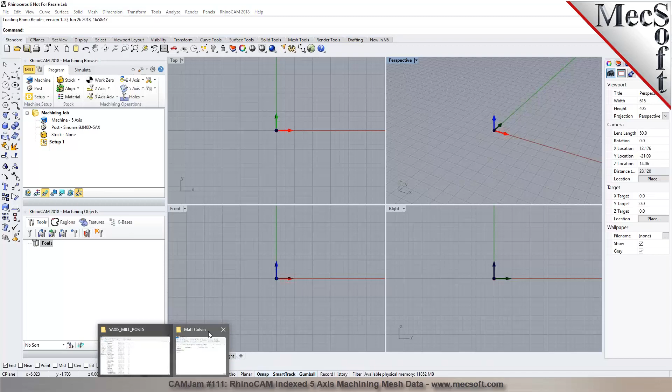So the typical workflow in here is we import or load the file. There's a couple of ways how we can do it. So I can just select this file that you had emailed us in here, and I can just drag it and drop it in here, and it'll ask you, do you want to open or import it? I can pick open.

And now when you open it, it'll ask you what units was this file designed in. Was it in millimeters or inches or whatever the CAD model units is? You can select those relevant units for it. Would you know if it was in millimeters or inches? Try millimeters. Millimeters, okay. I'm going to accept that. And it's translating the file, reading it.

And once the part is loaded, you will see that up here on the viewport. So if your part has a lot of triangles or meshes on it, the load time could take anywhere from a few seconds to a couple of minutes. So as you can see here, it's in the process of loading it. And you can see now it shows up in all the 4 viewports. I can just maximize it to 1.

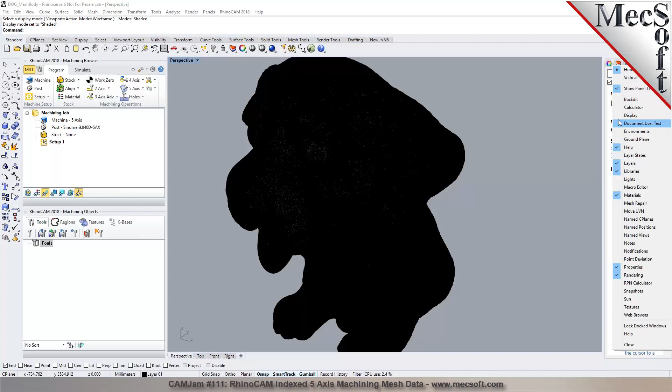I can click on display in a shaded view, and I can also go into this display tab in here, where we can turn off the display of the mesh wires. So I can go into the display tab and turn off the wires so we can actually look at the model.

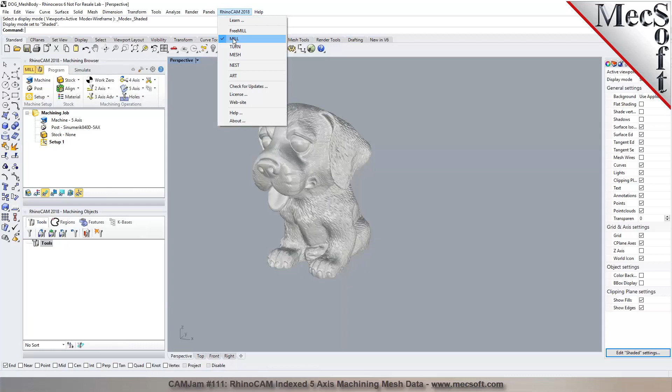Okay? Yep. All right. Now, the part is somewhere out in space, so we'll look at how we want to align it, orient it. So the typical workflow is once you bring in a part, you can go into the machine setup on the Program tab in the RhinoCAM's machining browser. So the RhinoCAM's interface appears directly in Rhino. As you go up to the RhinoCAM menu, you'll see that the mill is automatically selected. So it's a fully integrated CAM plugin for Rhino.

So the typical workflow is you go down to the Program tab, you select Machine, and you define the machining process here. So you would select the machine number of axes is 5. You pick the configuration as head because the machine that you have, the Thermwood, uses the rotation on both the heads. You can specify the primary axis, the secondary axis, and this is where we talk about the gauge length. So this gauge length is the distance from the pivot point to the spindle face.

And then you also specify the tool length as you define your tool, since the tool lengths could vary for each tool, but the gauge length is going to be the same for a given head. Am I making sense here? Yep. Okay, so you would put in this. Do you know what that would be? I have that gauge length. It's in inches. It's 10.4983. 10.4983. So take away one of those 4s.

Okay, got it. Right now this is excluding the tool distance from the tip of the tool to the spindle face. Is that correct? So we will add the tool length to it. Okay, perfect. So when you set this to a non-zero value, we do that automatically.

Now, as far as the post processor goes, we've developed posts for a wide range of machine tools, and we also have several different variations for Thermwood machines as well. So you can see that I have a bunch of different posts in here. So if I grab one of these posts, I'm going to go ahead and grab this. If I do an edit, this will let us modify or customize the post processors in here. And you can see here we use either the G47 or G52.

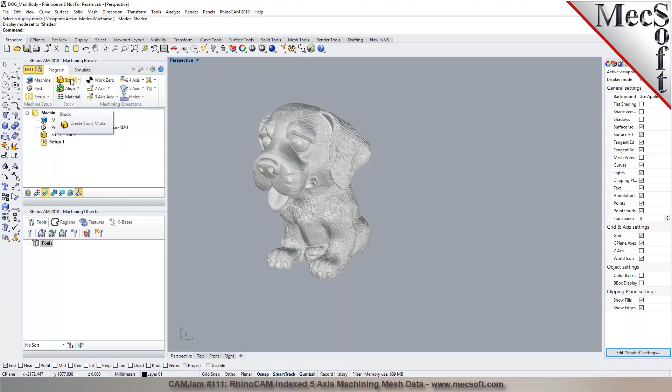So as you take a look at it, the part looking down from the top view, does the part look in the right orientation? Or as you look at it from the front, does it look as how you want it to be machined? So make sure that the part is oriented and placed correctly on the machine tool. So that would be the next step, the orientation. You can orient the part if you need to. And then you build your stock material.

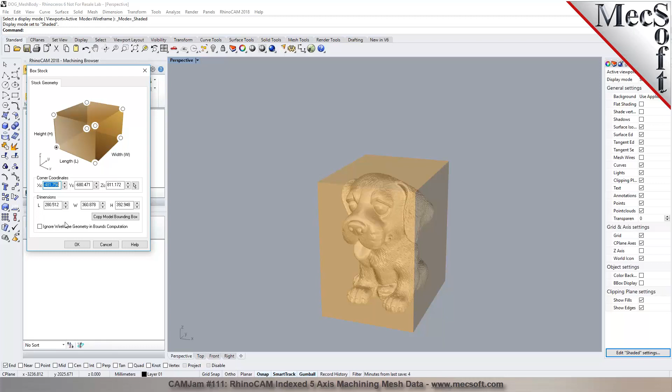So when you go to stock and box stock, this actually computes a bounding extents and gives you the length, width, and the height. Is that in millimeters or inches? Right now it's in millimeters. Okay. Do these numbers look correct? Right. Yep. Okay. Would you like to work in millimeters or would you like to work in inches? Inches is preferred. Okay, so the process to switch is pretty straightforward.

So just right-click on the millimeter units down in the status bar, go to unit settings, and then you can change from millimeters to inches, and then you accept that. It'll ask you, would you like to scale the part, and you select yes. So in this particular step, the model unit was switched, and then you can go back and check the extents here. Now you can see that the length, the distance on the x-axis, is about 11 inches, the width on the y is 14, and then the height or the thickness is about 15 inches.

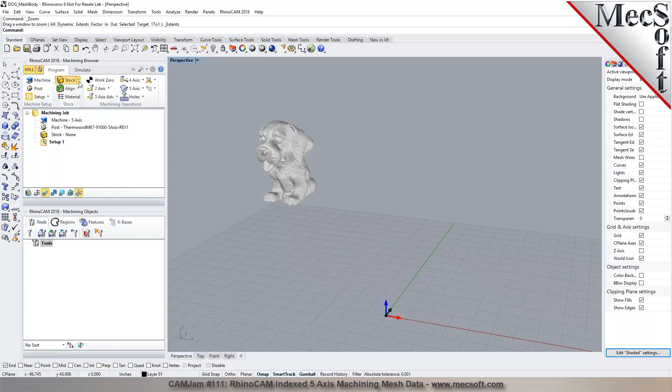That's correct. All right. So we could go ahead and define the stock in here, or we can orient the part and then create the stock. So we can do align part. We could say we want to put the part to the lowest Z and in the center. If you want to put it in the lowest Z and center, you can place it right there. So now the part is right on the origin as you see it.

Now, would you like to zero it out to the top or to the bottom? We can zero out. That's fine where it's at. That works. Okay. And let's go ahead and create a stock in here. And I'm going to hit copy model box. It gives me the length, width, and height. I'm going to make the stock slightly larger.

So instead of 11 inches, I'm going to put in 12. I can change this to 15. And then the height is 15.47. I can round it off to 16. Okay? Yep. And the next step, we want to align the stock to the part. So what we would want to do next is basically go through the process of align stock. We want to put it to the bottom, and then the center in X and Y.

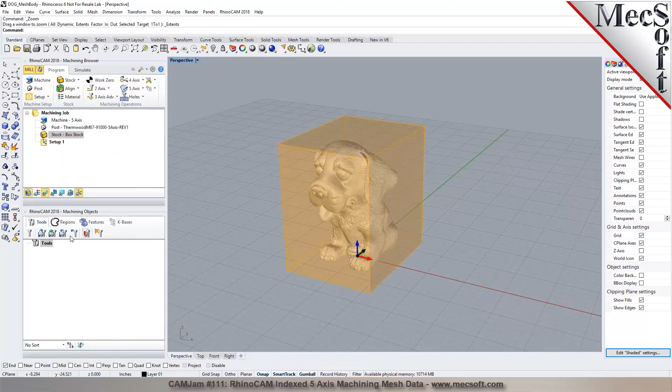So as you take a look at the stock and the part from the front view, you'll notice that the bottom face of the stock is flush with the bottom of the part. And if you look at it from the top view, you will notice that there's material left on all the sides. So now when you save this file in Rhinoceros, it will ask you where you want to save it. You pick save. All of the information that you put in so far gets saved with the file.

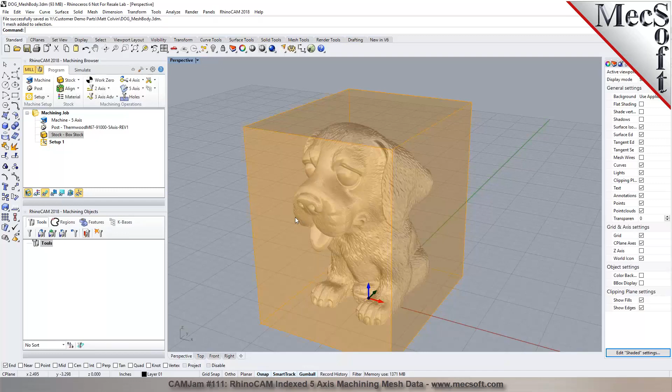So one of the things you could look at is the number of meshes or triangles you have on this model. For some of the machining applications, you may not necessarily have to have a model that has so many millions of triangles. So one of the things you could do is go into Rhino and type in the word what, and it'll tell you how many meshes are there. So you can see it's a little under 3 million. Is that right? Yep. Okay.

So there's a couple of ways. To make it easier for machining, you can reduce the mesh in Rhino, or we also have an add-on module called Mesh, which gives you additional controls for mesh processing. So we have this mesh module where I can go in to do a mesh reduction. I can select this mesh, and I can say I want to reduce it down by, let's say, 70%.

And then I can pick reduce. This will actually reduce the number of triangles to a third of its actual size. So the mesh module will allow you to do mesh processing, mesh editing. You can also do mesh offsetting. So there's a lot of mesh tools available to you.

So if you don't need such a high, fine refined mesh, you really don't have to have it. It'll also improve the processing of your toolpath, making it a lot faster. It's just a balance between reducing the mesh and lowering the surface finish. If you look at the details after reducing the mesh and it looks good, then what you see is what you get when you actually program or machine it.

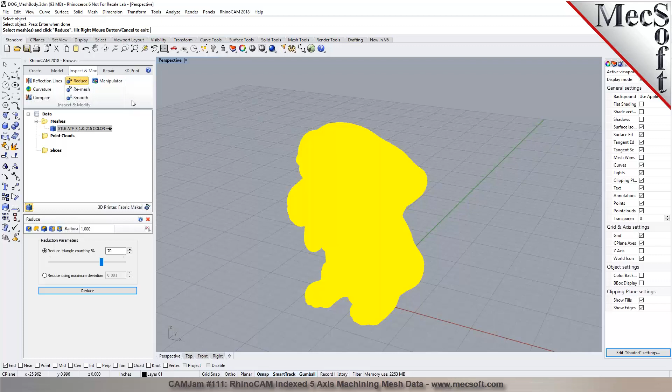So now we can see that the mesh reduction is completed, and we can take a look at the count of how many triangles we have. You can see now it's down to less than 1 million triangles—859,000 triangles. So now you can see the details are still there, right? It's not like we've lost it. The resolution is still there.

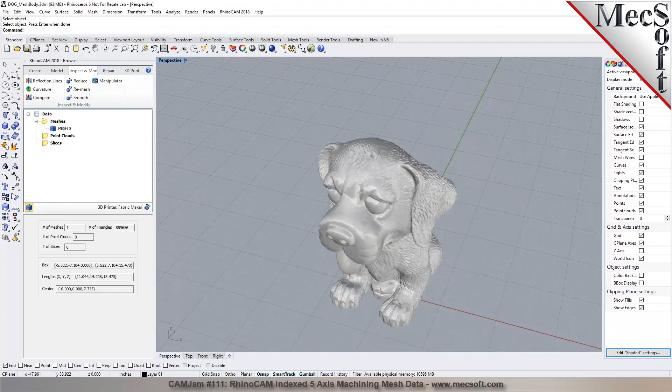It's pretty good. Okay, so let's go back into our mill module, and then we can start processing our toolpaths.

Now, typically, in a part like this, you would want to do indexed machining, like machining from different orientations. Is that right? Yeah. The first step is mostly 3+2, 5-axis indexing.

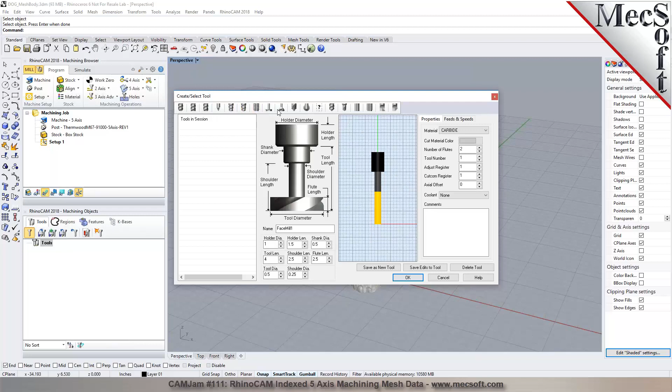So the prior way we do it is go ahead and create some tools, or we can load a library of tools. We support different tool types like ball mills, flat mills, corner radius tools for engraving, chamfer, taper, thread mill, flat mills. We can also use dovetail cutters, fillet mills, lollipop cutters—these can be used for 2D operations. And you have drill, center drill, reamer, tap bore, and reverse bore.

You can define tools under each tool type, also set the feeds and speeds, and save them all to a library. Now I could use these tools here or load one from a library. I can go find a tool library that may have been saved somewhere. So I'm going to go into one of my folders, and I'm going to go ahead and grab a tool library.

Just give me a moment, let me go look for a tool library file in here. Well, I can give you the 3/4-inch ball mill that we're going to use for most of it. Okay, is that what you're going to be using for most of the part? Okay, so I can just go ahead and drop a 3/4-inch ball mill in here. So I'm going to define a tool specified as ball mill 3/4-inch.

Now, would you be using the same tool for both roughing and finishing, or different tools? There'll be a 1/2-inch ball for finishing. So this will be the 3/4 for roughing, and then a 1/2-inch for finishing. And what would be a typical tool length, like 8 inches or 7 inches, or long? It's only...

4.074. Okay, you got it all precise. Okay, perfect. So I'm just going to put in tool length as 4.074, leave the tool number as 1. In the feeds and speeds, I can go ahead and establish feeds and speeds based on the material. I can also say what is the maximum RPM your machine can handle and the cut feed rate, and set these up here.

So, for example, I can put in this is 3/4 of an inch. It gives you a recommendation of the spindle speed and cut feed rate based on the material and the tool material, and I can change the spindle RPM. I could say I want to run it at 15,000 RPM. It'll recompute your feed rate for like 300 inches per minute. I can go ahead and accept that.

I'm sorry, can you repeat that again? It's a 4-flute end mill, so you actually get—you can go with a much higher feed rate. Yes, I can see that. Okay, so I can go back and change the number of flutes to 4, and go back to feeds and speeds, select this here, and now you'll notice that since the number of flutes is higher, you can cut even at a higher feed rate, right?

Yeah, good. So what would your feed rates typically be? On these Thermwoods, they actually just run them at 1,200 because the acceleration and deceleration is so slow that it doesn't matter.

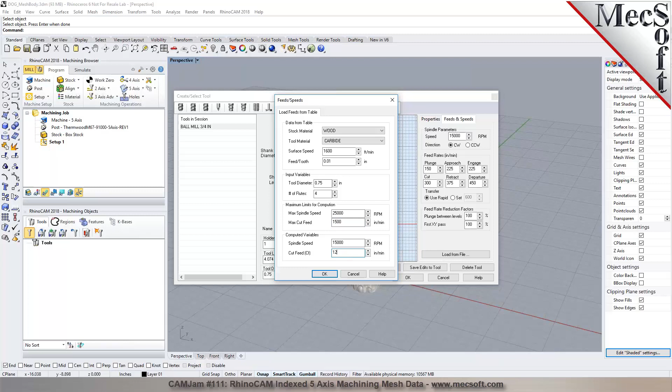So you can run it at 1,200. I'm going to put in 1,200 here, accept that, and save the edits to the tool. So this would be a roughing process with a 3/4-inch ball mill.

Now I'm going to select a 3D roughing process so we can rough it down in levels, starting from the top and working its way down towards the bottom in Z. The process would be to rough it out from different orientations, like 3+2, machining it from different planes or orientations.

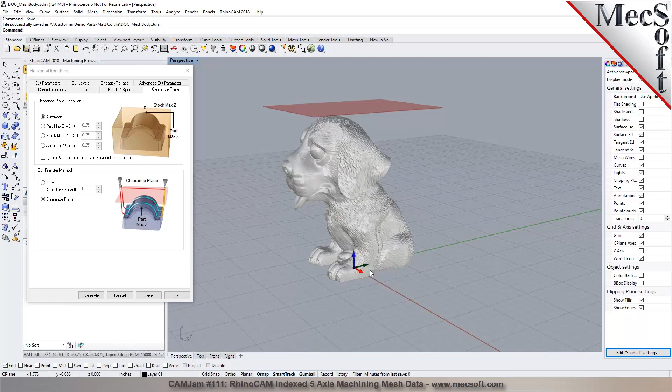So the process is: select 3-axis machining, and first do the roughing from the top down. Go to 3-axis, pick roughing, and select the tool. Your feeds and speeds are automatically loaded from your tool, and your clearance is set automatically based on the orientation of your coordinate system, parallel to the XY plane for machining. You can choose whether you want linear cuts or another type of cut pattern.

You can pick linear, if you just want to go back and forth, and give it a step over, like 50% of the tool diameter. So I could put it in as 50%, run it, and specify a tolerance. Since it's a mesh model, the model will be fine.

I can say leave about 0.2 inches of stock after the roughing process. Then I can go down to cut levels and say how much material I'd like to take down per pass, like 100% or 50% or whatever.

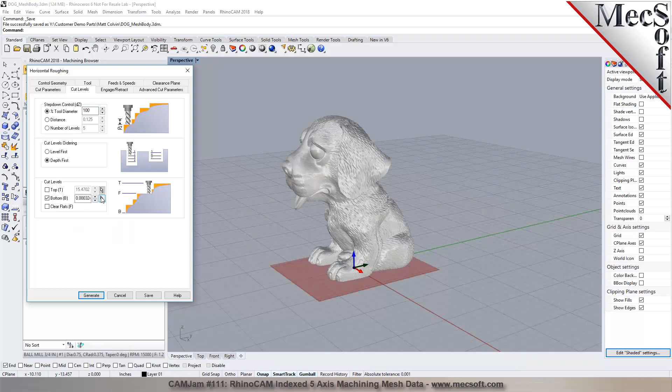In the bottom of cut, I could say how far down I wanted to cut. I can even pick a point in here, snap to a vertex, and say this is the point I want to go to. So the cutter will not go below the point you pick from each of the orientations. You just snap to a vertex, and it'll actually...

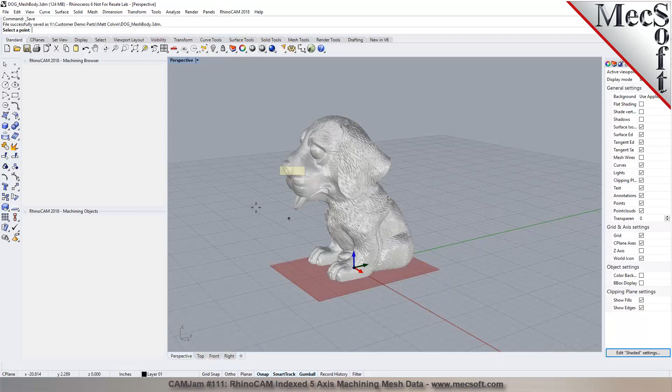transfer that information over to RhinoCam. When you pick a point, it obtains that information from your model, the Z height. So I'm just picking a point here, as you can see. That's how far down I want to cut from the top, just as an example. So that's 11, I could say keep it to just 12 inches.

Yep. Then you can specify your engage and retracts. If you just want to do a vertical approach, you could do that, and then set any advanced parameters.

And now we can generate this toolpath. In this process, it's going to create a roughing in levels toolpath—it does Z-level roughing, or roughing in layers—and create these linear passes, or you could call it lace cuts, just cutting back and forth following the 3D model.

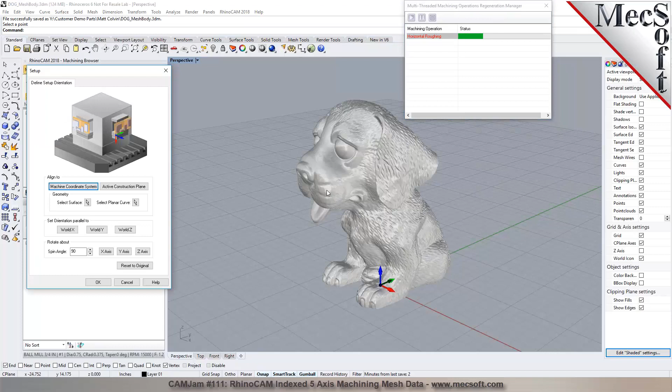So while it's roughing from one of these orientations, you can go ahead and process additional operations, like going back and creating a new orientation. In this particular case, I could say I want to change the orientation from the top to one of the sides, maybe look at it from the right side.

So I can rotate the coordinate system. I'm going to rotate 90 degrees on the y-axis. I can also rotate it on the z-axis if needed, but it's not necessary here. So now the z-axis is normal to this face.

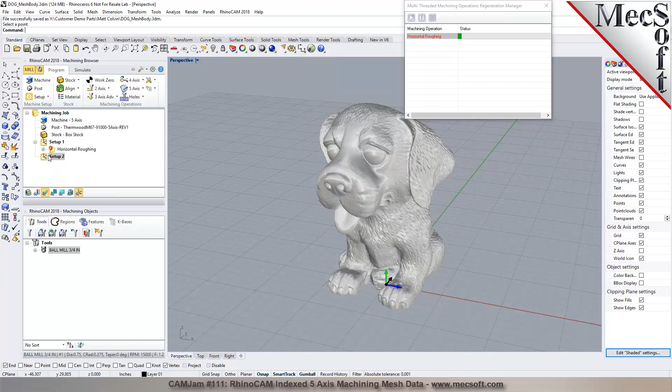I could repeat the same roughing operation, or use a re-roughing operation, which will take into account the stock left from the previous orientation. That's how you create the 3+2, or lock the tool axis to different planes or orientations. Now you can see the roughing operation is completed, taking account of the defined stock and creating the roughing in levels.

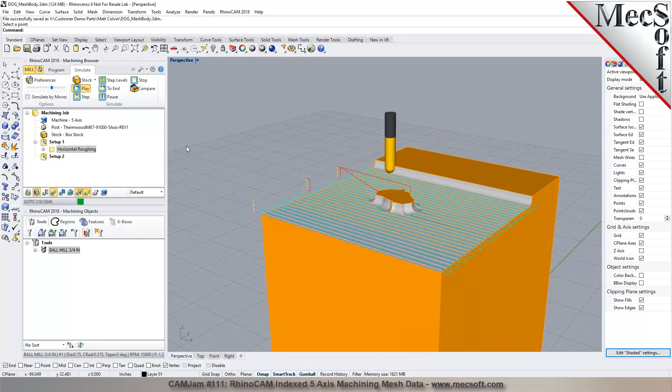Now let's go ahead and run a verification for it. You can see that with the ball mill, it's cutting it, roughing down in levels. I just chose a linear pattern—we have other types of cut patterns as well, like offset patterns. So you can see it's going down in levels or layers.

Now, if you do notice a collision, it's going to mark those areas during the simulation. So if you're cutting too deep with the tool based on the tool length and the holder diameter you put in, if there's going to be a collision, it'll mark those areas.

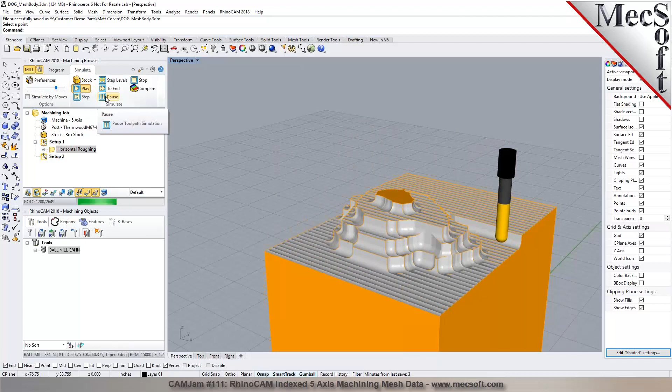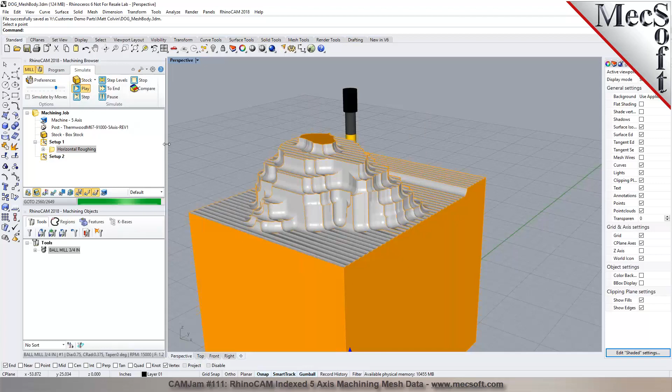At any point of time, you can pick the pause button and then pick simulate to end, and that'll run the simulation all the way through to the end. Any questions so far? Okay, so looks like that will be the final cut right there. I'm going to do a pause, and then I can do simulate to end, or just let it run through the simulation. So there's the roughing operation in here.

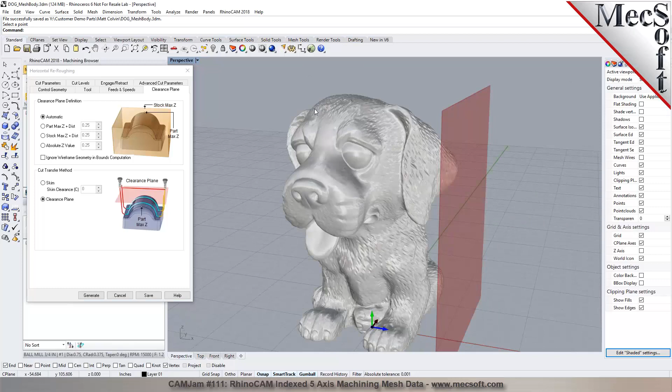The next step is, we've already oriented the coordinate system, and I'm going to create rather than a roughing, I'm going to do a re-roughing, which will take into account the stock left from the previous step. So we use the same cutter, same feed and speed settings. The clearance is set, and you can see the clearance plane is parallel to the rotated XY plane.

Then you can set your parameters in here. Use the same settings for the stock to leave. I can leave 200 thousandths. I just set my tolerance, the in tol and the out tol.

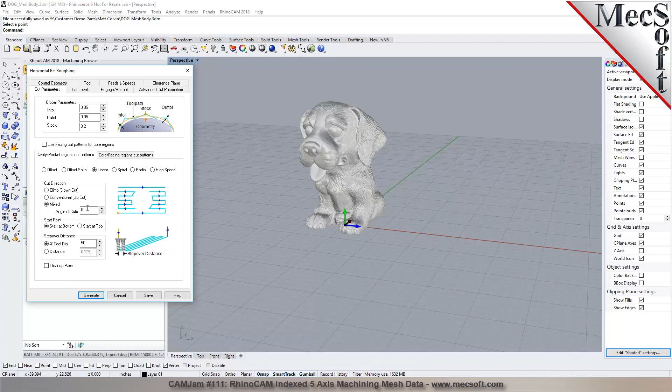Use the same linear cutting pattern in here. Now I can run the cutter either parallel to X or parallel to Y. I'm just going to leave it as parallel to X, or if you want to run it parallel to Y, you can do that too. You can change the angle of cut, so if you want to go parallel to Y, you put in the angle as 90 degrees, and it'll go back and forth parallel to Y. If you want to leave it as 0, it goes parallel to X.

And the same settings you can use for specifying your step overs in here.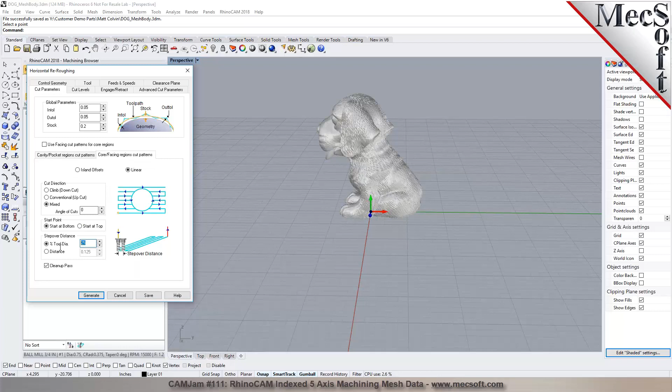Now let's go into cut levels. This is where we want to specify how far we want to go back to. You can see that the plane you're putting in is also parallel to this axis. So I could say I want to go past maybe the midpoint here.

I can even enter in a value here, or I can snap to the cell in the grid. I can say snap to my grid, and just go ahead and snap to the grid right there. It looks like I just clicked on our website in here. I'm just going to go pick this point right there. So I can specify the value, or I can say minus 0.25 or minus 0.5, giving it a little bit of overlap in there.

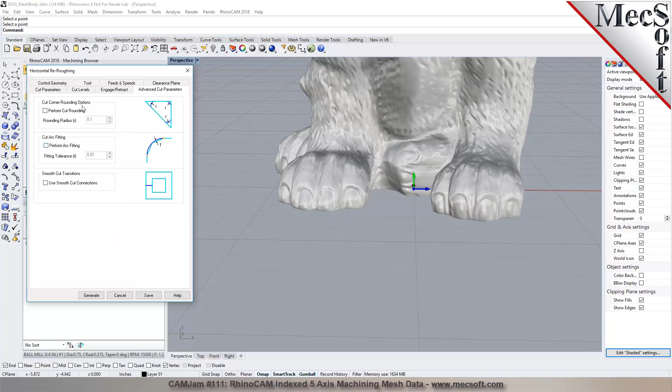Then I can basically do a vertical approach for entry and exit, save it, or do a generate on it - right-click, regenerate. In this process, it's computing the toolpath, and again we are using the multi-threading manager, so as this is being computed, you can create additional operations.

Now what I'm going to do is take the setup in here, do a copy and a paste. So the setup will be mirrored or copied completely. You get a copy of the setup, and you can mirror it now to the other side by double-clicking on it, editing it, and changing it to the other side by rotating it about the y-axis by 180 degrees.

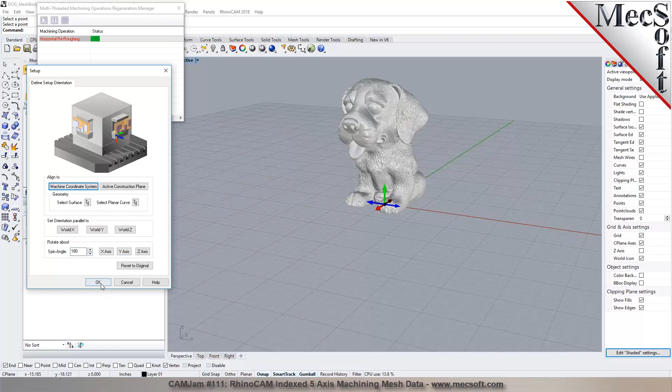So you want to machine it from the other side, right? Yep. We can also do the back of it, and also from the front of it, we can set it up to different orientations, to see how much material is being left in the roughing process after the re-roughing is completed. So it's very intuitive, powerful, and easy to use, as you're seeing right here.

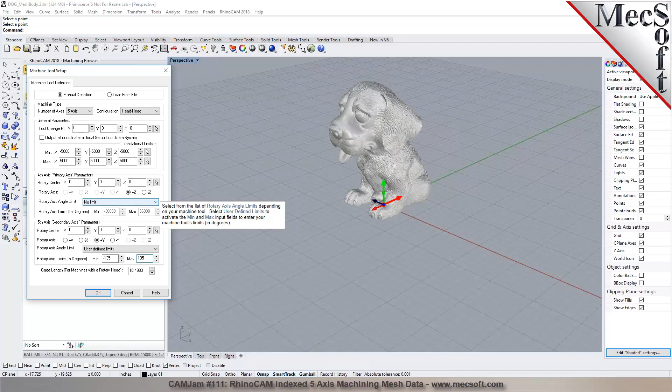Now, one of the things I would also have to do is go back into this machine setup, and I can set up the limits of the primary axis. So if you have a 0 to 360 limit on the C axis, you can specify that. And the secondary axis typically is like minus to plus 110 or 120, depending on how far it can travel. Yeah, it's 135 - so plus or minus 135, I'm going to put that in here. And then the primary axis is 0 to 360, I'll put that in here.

So now you can see that the roughing operation, the re-roughing, is done. And as you can tell here, it's not cutting air because it knows that the material is already cleared out. Is it going underneath the part?

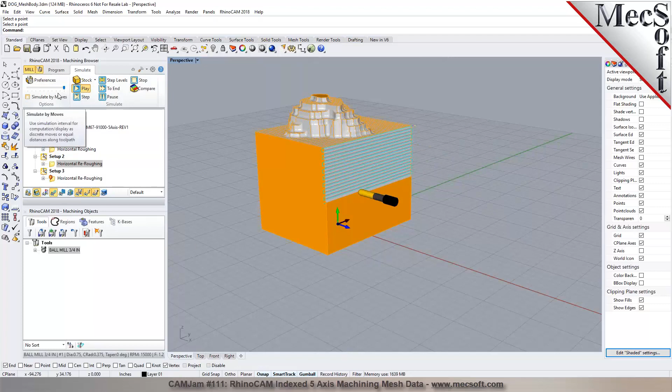Wherever the cutter can get to, it would. From looking through that, how do you limit it? Yeah, how would we limit it to not cut the bottom of the part so it doesn't fall off? So we can put a region around it in here to contain the toolpath. You can see now it's going all the way down to where the stock is.

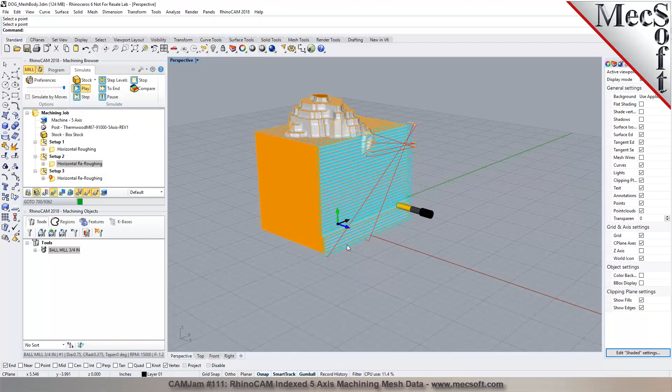Now typically you may want to put it on like a raised pedestal, you can model something so that way there's enough room for the head to go down, but then at the base of the stock you may have like a little cylinder and then the stock extends and sits on top of it. That's how you may want to mount it, right? But if you want it to not cut all the way to the bottom, you can put a bounding rectangle, like a region, simple as a rectangle to contain your toolpaths.

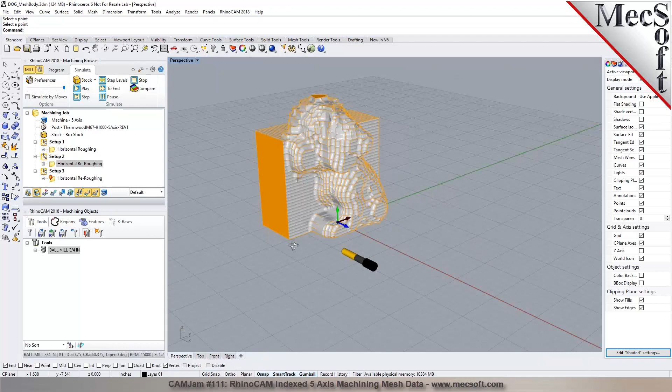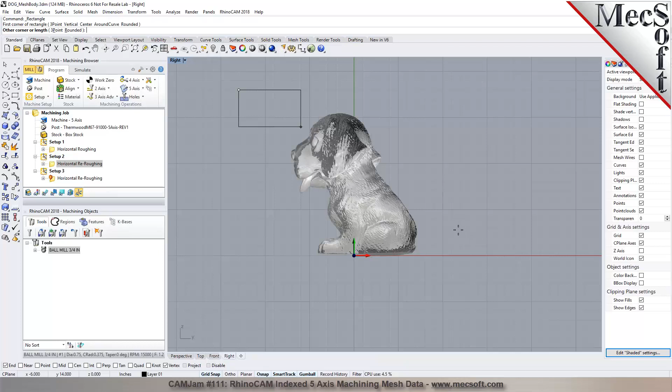Yeah. And I can show that to you here. So I'm going to run through the simulation here. Right now you notice that it's going all the way through the bottom, right? So if you want to limit the toolpath, I can go over here and I can create a machining region. For example, a region could be as simple as just a rectangle in here. I could say this is how far I want it to go and cut. So I can pick two corners to define a rectangle, and the rectangle can be used as your containment.

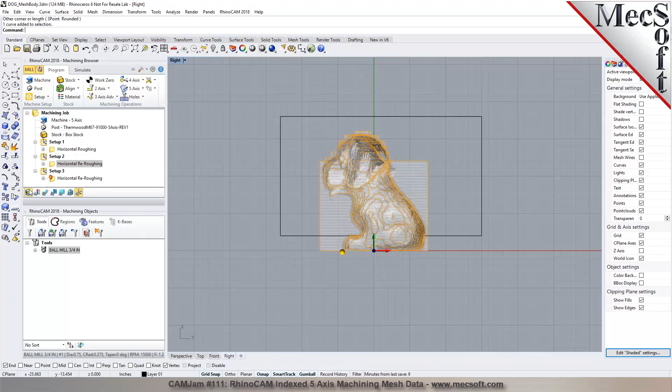So I can pick and then use it in the rough operation. Can you dimension that now, to the stock bottom? Yeah, you can specify it and you can do it in Rhino. Yes, that's all in Rhino. So for example, if you take a look at the stock in here, that's how far down it's going, right? So if you analyze a point in here, it tells you what this coordinate is. So you're about 2 inches off the base.

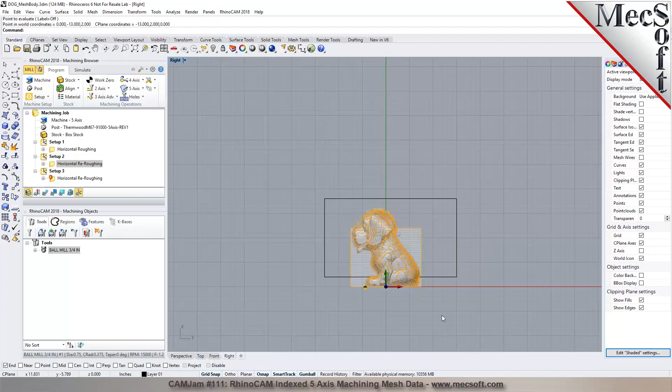So now I can just use this as my boundary in here. I just put a boundary that's larger than the part. I could even make it smaller. Rhino has tools to adjust these settings in here. Yep, and then if you wanted to set that like 1/4 inch off the bottom of your stock? Yeah, so the bottom of the stock is 0, right? So I can take this down and move it down by minus 1.75.

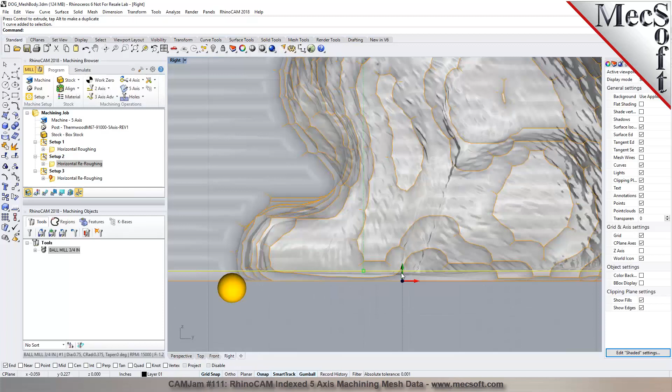If you do this here, the tip of the tool is going to stay up to this. So I would say add the tool tip also to it. So I would move it up by 0.375 from here. Okay? So now I can select this in here, and I can pick that as my boundary. That's how easy it is to create these boundaries.

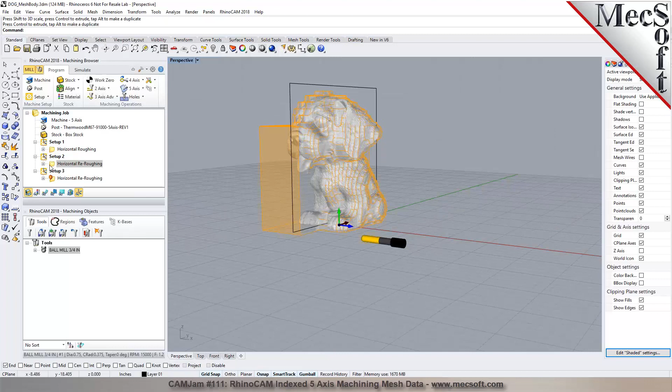Now I can go back into this machining operation. I can edit this, and then I can select a boundary. I can pick this, and then go back and regenerate the toolpath for it. Cool. So now the toolpath gets contained to this area, and it's going to basically limit the toolpath to the boundary. Any questions while the toolpath is being computed? No.

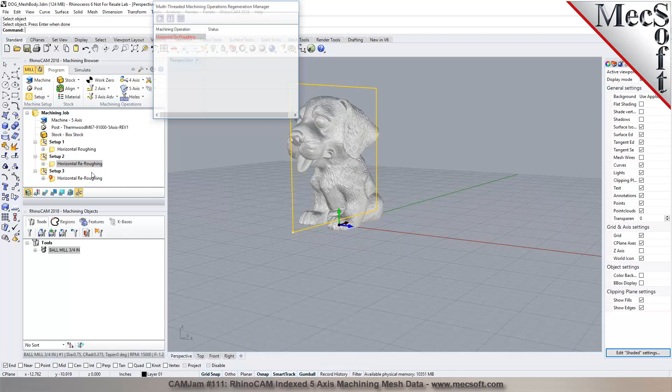Okay, so as you can see, the re-roughing operation is taking into account the part and the stock that's being left from the previous steps. So it's not just computing the toolpath based on the initial stock. If you're doing it based on the initial stock, you'd probably be cutting a lot of air because those materials have been cleared out in the previous process. So this is a very efficient process. Now you can see that the cutter is automatically stopping right there. Perfect.

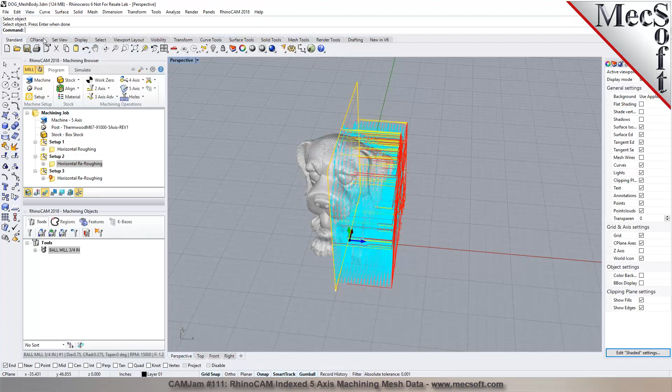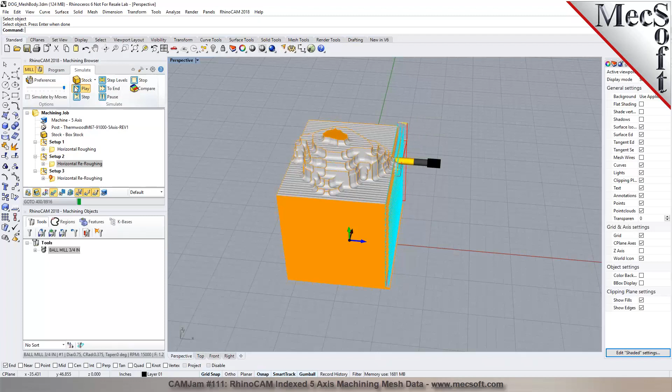Okay. So now I'm going to go ahead and run a simulation so you can see it. So that's doing your cut material verification. Yep, looks good.

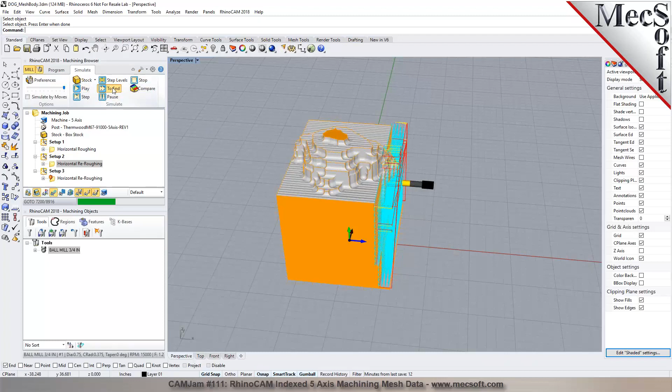I'm going to do a pause, pick simulate to end. You want to hide the toolpath? Absolutely. So now you can see that there's a holder collision with the stock right there. Yeah, so those red are showing holder collisions. Now I can repeat the same for this side in here. So the holder collisions are also marked, and you can also see them being represented on your toolpath in here. So those are the lines where you can see the holder collisions.

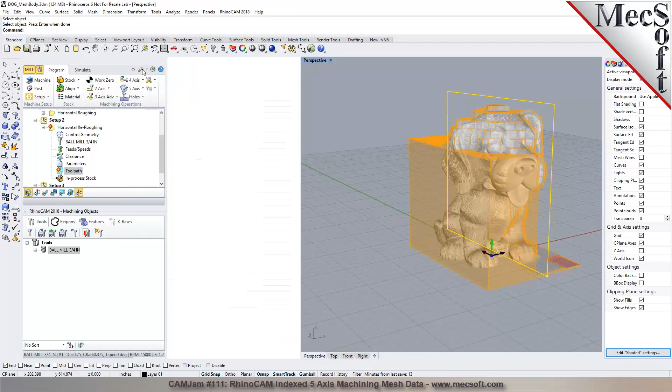Okay, now let's repeat the same for the other side in here. So I'm just going to go back and reselect this region in here. So basically we copy the settings over from the previous operation. The same cut levels are being set. Pass on the side. And then I'm going to right click and regenerate this toolpath in here as well.

Any questions, sir? Nope. Okay. Now the next thing we're going to do is take a look at the posted output in here, and we'll also do some pre-finishing operations. Okay. Yeah, let's try and just put a finishing off with the same 3/4 inch ball. Okay. And then we'll look at the output from the post processor. Okay.

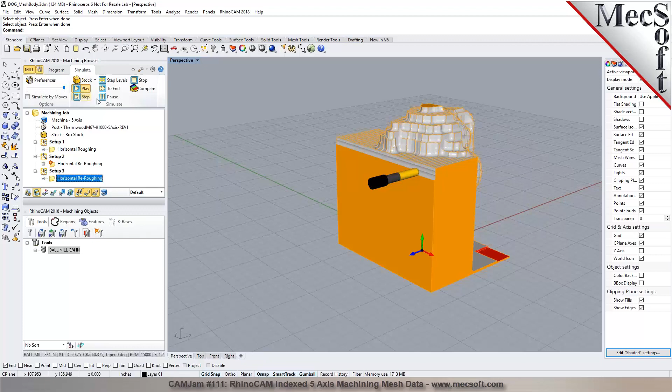So the re-roughing is being computed, so I can go back and do some pre-finishing operations in here. So I can start with the same side, or, okay, so looks like this one just got done here, and we are running a verification for this as well. Yep, looks good. Hopefully fine. Okay, now let's go back and do a pre-finishing in here.

So with the same orientation, I can go back and do a pre-finishing, or we can rotate it back to the top in here, put it back to the world coordinate system, and then start over by doing pre-finishing. So there's different ways you could do it. One of the popular operations uses a parallel finishing in here, where you can specify the tool. I can go ahead and use a 1/2 inch from a 3/4, right? Is that what you prefer? I would just use that tool for now. That's fine. Use the same one? Okay, we could do that.

And then we'll specify feeds and speeds, clearance. In the cutting parameters, you can set the tolerance for finishing in here. I could put that in there. The angle of cut, you can say 0, 90, 45. I'll just go at 45 degrees. You can say how fine you want the cutter to step. You could do like a 5 or 10% step over, really fine.

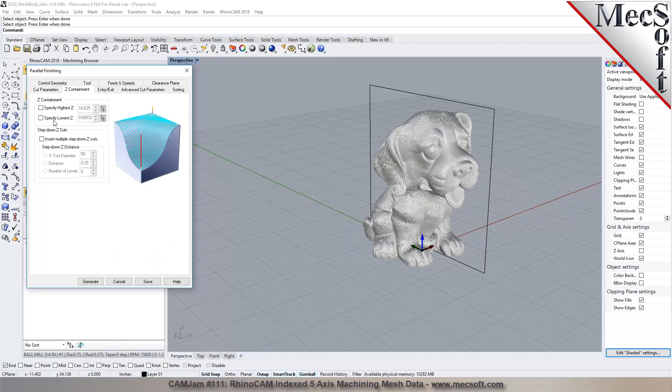And I can also put in a Z containment in here. So I can say I only want to go down up to 16 or 12, right? So that's how far you want it to cut. You can specify that. And also you can control your entry and exit. You can also do clearance and say skim when you transfer between areas in here, like 50,000 to 25,000 skimming over. What is skim, sorry? So rather than retracting all the way to clearance between transfers, just skim above the previous cut. Yep. So now I'm going to run this toolpath in here.

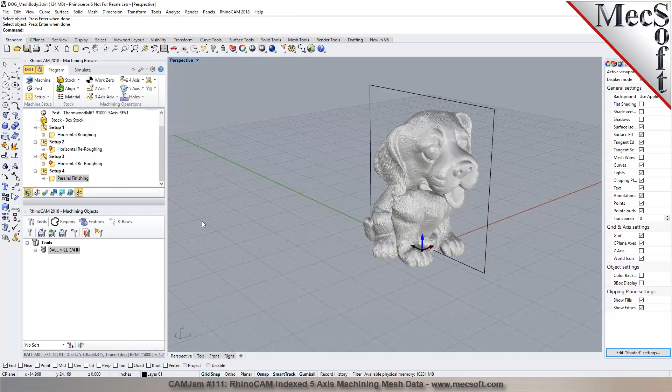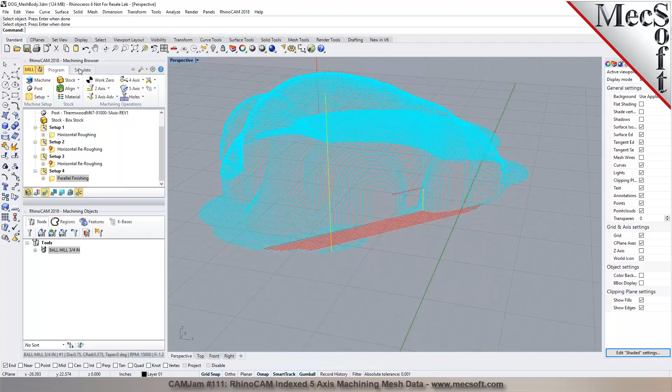Okay, so as you can see here, the roughing just got done right there. The pre-finishing toolpath is generated. So you can see these transfers, as I was talking about, skimming rather than retracting all the way up to the clearance plane. Also the region, I could create different types of regions in here to limit the cutter. So right now it's just using a boundary in here. I didn't pick a region. It's just automatically looking at the model, and then since I said do not cut below a certain Z, it's just extending to the plane and face.

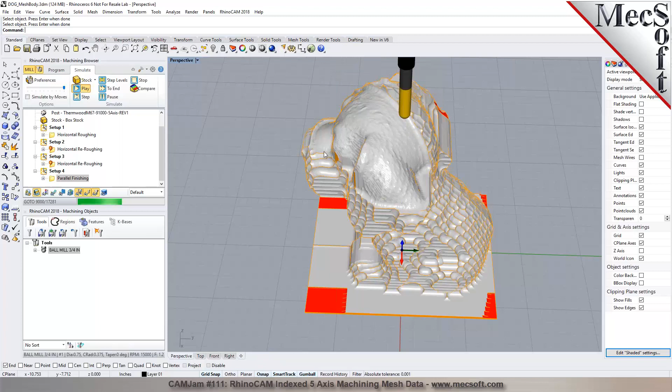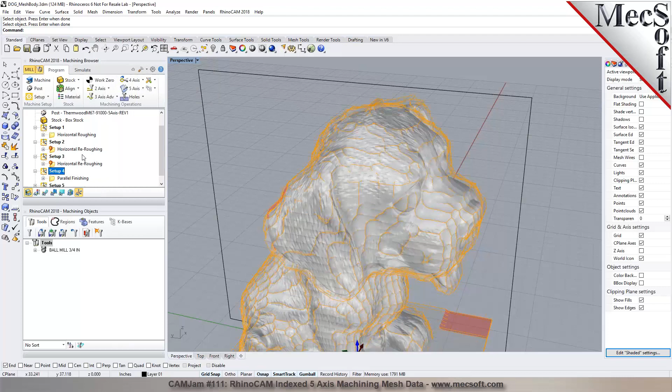Okay? Yep. So there's our roughing process and pre-finishing process. So we can do multiple levels of pre-finishing. We can also do it from different orientations at different sides, similar to what we did on the other one, right? I can go back in here, make a copy of the setup, paste it down, and then I can apply the same

orientation in here, put it to 90 degrees on the Y, and basically take this operation in here. I can use the same containment boundary. Then I can say Z containment, go to minus 0.25. And then generate that pass. I can go generate it.

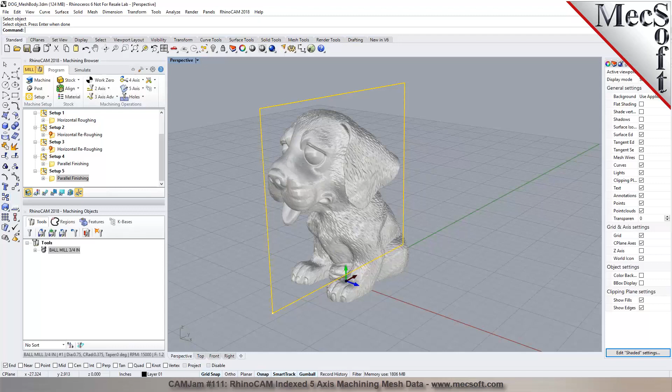Now, does that parallel finishing do like the re-roughing does, where it monitors what stock has already been removed? Parallel finishing is actually a finishing operation, so it does a finishing based on the part itself. Okay. So it doesn't take into account the stock already completed. It looks at the part surface and creates a toolpath. So it assumes that the part is already pre-finished, re-roughed out.

So you can see now it's doing a finishing. We're just going down from one of the sides, right? It's cutting at an angle of 45 degrees. Yeah. So you see the nice finishing cuts right there.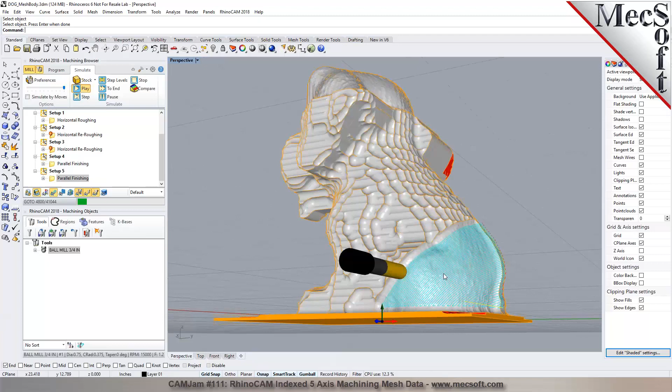So I just chose it to go 45. I could have just gone at 0, which would have been parallel to the rotated X coordinate axis. Do you have any questions so far? Nope. Okay. But so there's not a way, because it's going to go and redo the head portion that we already did on the first.

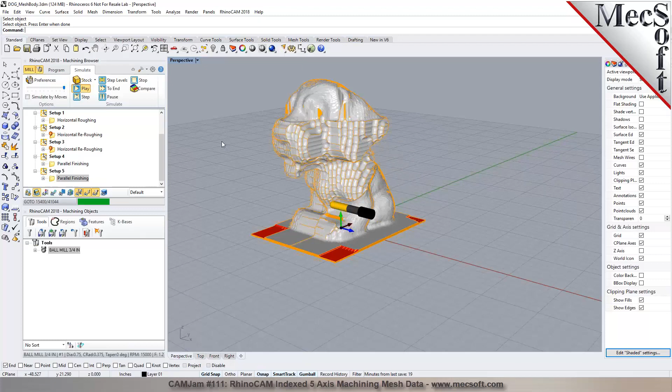Yes, it would. So we would need to go back and modify the region to put it into a smaller area. Do it by containment. Right. Yeah. You just draw a containment. You can use different ways. You can contain it in Rhino, and you can limit the toolpaths. That's fine. So any closed curve can be selected as a containment boundary.

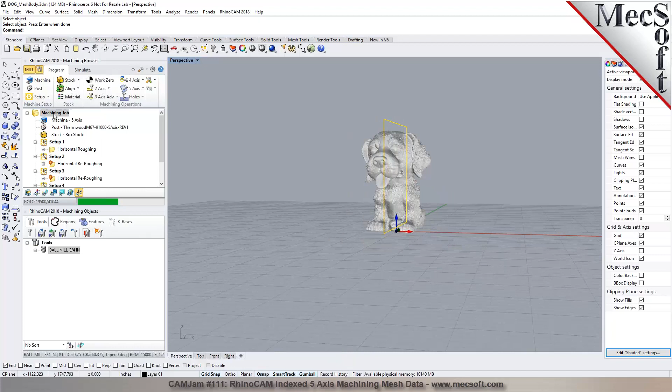Okay, so I'm going to go ahead and just pause the simulation here, as you've seen the process. So I'm going to go back to the Program tab. So now we can consider this as partially complete. Let's take a look at the time for machining information. It gives you the estimated time for each and every setup, as you see right there, based on the parameters and the features that we put in.

And then finally, we want to send this out to the machine. We right-click and do a post all. And I'm just going to put it right on my desktop. And the posted code should show up in just a moment. Okay, there it is. You can see that the B0, C0 is the primary one. Then we can do a next search for the next B value right there. Yeah, I see that. I see C180, B minus 90.

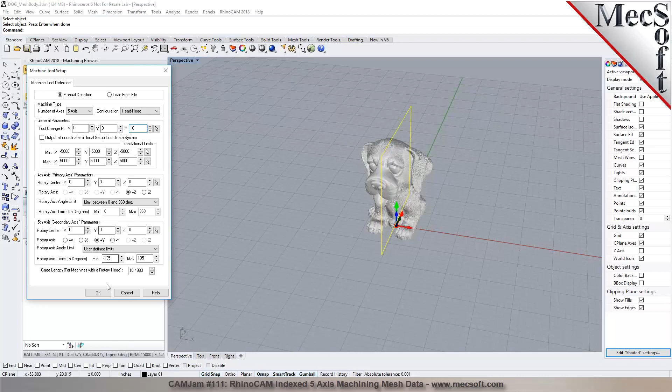And before we rotate the head, we can move it to a safe spot so the head rotation can be performed. So that's something you can define. By default, it's set to 0, but you can define it over here. So the stock is about 16 inches. If I have enough Z travel available, I could say I want to move it up to, let's say, 18 inches in Z. And then X and Y would be 0.

So when I repost this out, you will now notice that before each rotation is performed, it's going to move the head to that specific position and perform the rotation for you. Correct. I'm opening up one of our G codes that we've run. Yep. So we can tailor or modify the G code to whatever your controller or machine expects. We can certainly do that. That should not be a problem.

And we can also customize the post, like I said. We have several customers who are using our CAM products with a Thermwood machine, so this is not something new to us. Okay. I would like to be able to try running this G code on our machine just to see what it looks like. Is there a way you can post out this little bit of code that we've done today, just so I can watch the machine run and look at the offsets?

Yes. I would have to get permission from my manager, and then I can certainly provide you a sample code. There are certain things you need to make sure of, if you need to set up any of the parameters on your controller, like presets such as G804 and G09 F8. These are all specific to Thermwood. I'll send you my header file that you can look at, for what I have in there now, like the machine tolerance, the tangency factor and stuff like that.

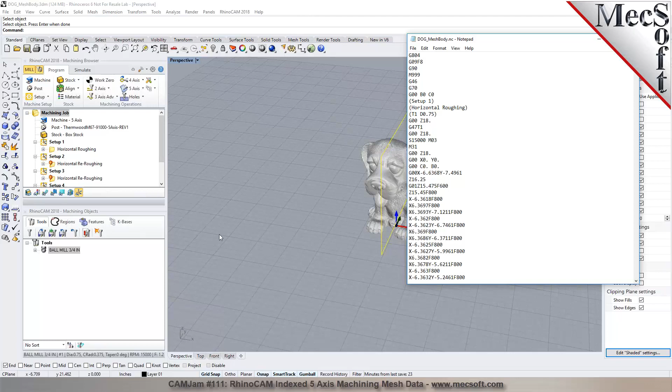Yeah, so as you can see here, if I go into one of the setups, let's look at this parameter. If you take a look at the first tool motion, that's your coordinate system in the rotated plane. So if I take this toolpath motion and output it here as just a curve.

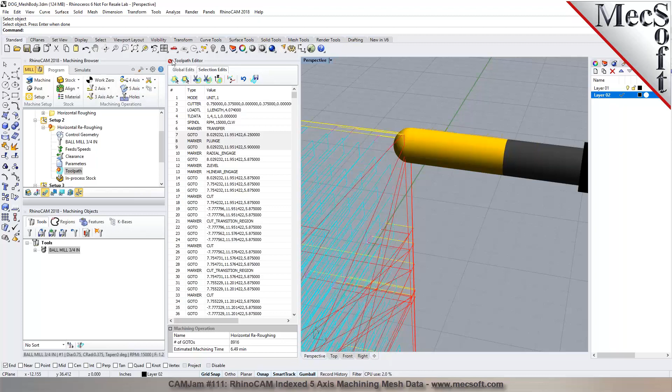So if I analyze this point, that's the point in the world coordinates, X, Y, and Z, right? So if I go ahead and take a look at the re-roughing operation, which is the setup number 2, if you notice the X value is not 6.25, it is 20.822, which is basically factoring in your gauge length. If you do the math here, the 20.8223 minus 6.25 gives you the total gauge length.

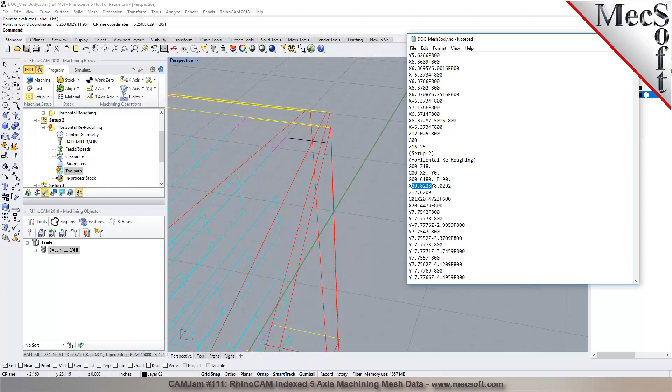Yes. Yeah, it should. Plus the tool length too. Plus tool length. Yeah, plus tool length. It's about 14 something, right? And also the Z value would drop by the same negative amount, because in order for the tooltip to be over here, the pivot point needs to be over here. Right? So that's how we automatically compensate for that.

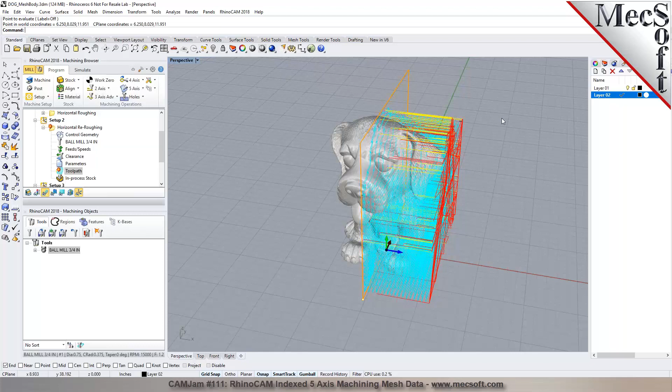Yeah, so if you can send me a sample code, you could email it, and then I can certainly take a look at it. Yeah, that would be great. And if we can get this machine running under your code, we'll look at getting either the indexing or maybe full 5-axis. Okay. Yeah, so for our simultaneous 5-axis, you can use this STL model as your gouge check surface, but you need to have a surface that you model so the tool can remain normal to that surface that you're trying to machine.

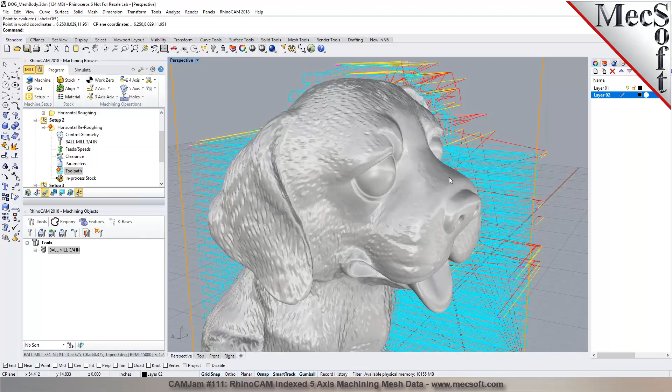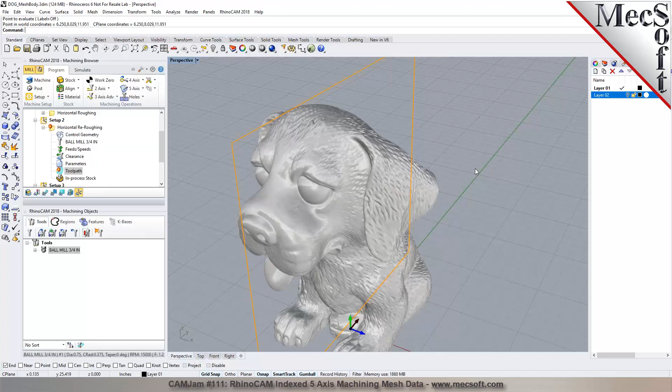So can you do like an offset surface for the full 5-axis? You can model something that could be slightly positioned inside this model itself. So you can have a surface drawn, and you can use that. For example, if I look at it from the side view here, I can model something in Rhino. This is maybe a surface that's going underneath it, then use it as an extrusion, and use that surface to drive the tool path. So the tool will remain normal to the drive surface. The drive surface has to be a NURB surface. It can't be an STL file or a mesh geometry; it has to be a NURB surface.

Okay. Well, let's see if we can get indexing working, and then if we need to upgrade and play with full 5-axis, we'll do that then. Okay, that sounds good. Do you want me to send the G-code file to support? Yes, that would work. If you could email it to us, I can certainly take a look at it for you. And then hopefully you can send that file back to us. I can do a part of it, maybe like one top and one of the sides, if that would be okay.

Oh, like the first setup and the second setup? Yeah, maybe the roughing from the two setups, or maybe roughing from the first setup and finishing from one of the side setups. So, yeah, I could do a roughing. I just want to see the pivot distance work. Right. To see how the gauge length works, you need one of the side setups in there. So I can do roughing from the first setup and roughing from the second setup. That should give you what you need. Yeah, that should work. If you could do the second roughing, setup 3, just so I can see it bounce from side to side. I don't need any of the finishing paths.

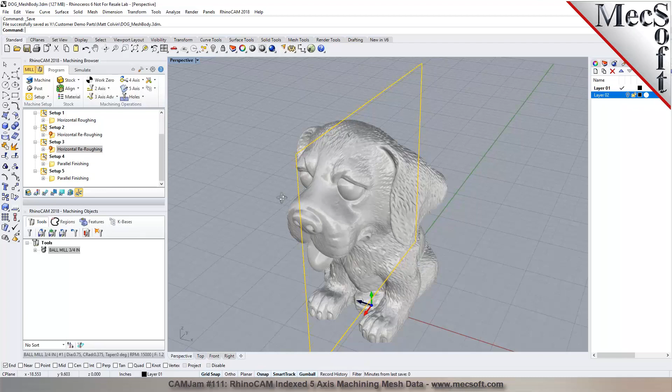Okay. All right. I will talk to my supervisor and get approval so I could send it out to you. Yeah. And then if you can email me a sample code, I can take a look and make sure that the output we are generating from RhinoCAM is similar to what your machine is expecting. So if there's any additional tweaks or changes, send that over.

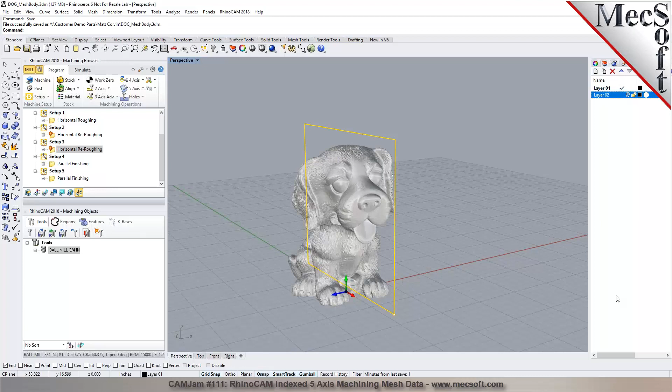Okay. Sounds good. I'm sending that file right now. Okay. I will look forward to your email, and then we'll get you the necessary information. Yeah. Thank you, and we'll move forward from here. All right. Sounds good. If you would like to give me a moment here, I can have you talk to my manager, who would be able to do a quick